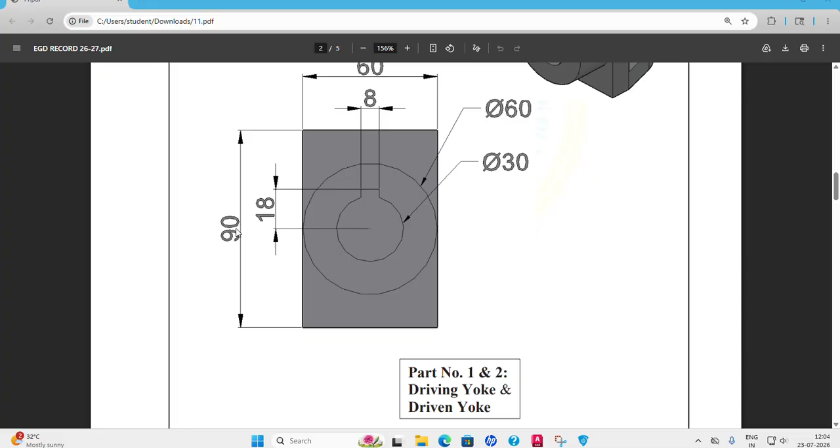This is the first component. It is having 60 mm height, as given here, 90 mm, 60 mm width. Let us draw this shape and extrude it 90 mm.

We'll draw. This is 60, this is 20, this is 15, this is 15, 60. Likewise, one by one we will do.

Open AutoCAD and move on to SE isometric view. Now switch on ortho and 3D modeling, and draw that shape.

60. This is 15. Let it be again, take line 15 and draw. Then from here need to draw one circle.

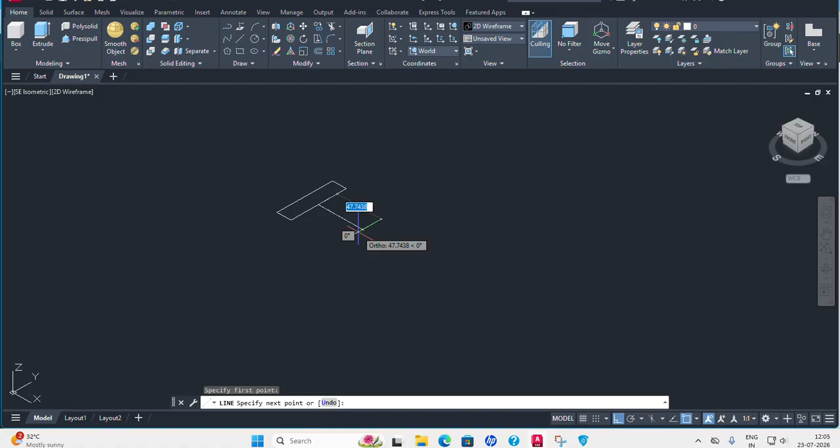How much height? Refer that question. This is 20 mm from this center, 20 mm circle center, and this circle is the outer circle, 23 mm radius. That circle center is 20 mm, 23 mm radius.

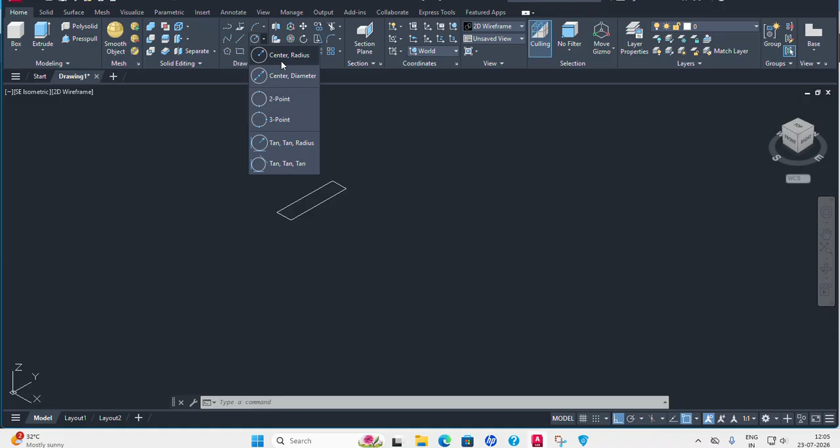So you take circle with radius, draw directly here a 23 mm circle. Thereafter move it 20 mm this side: move, select object, enter 20 mm, and draw another circle of diameter - will refer that.

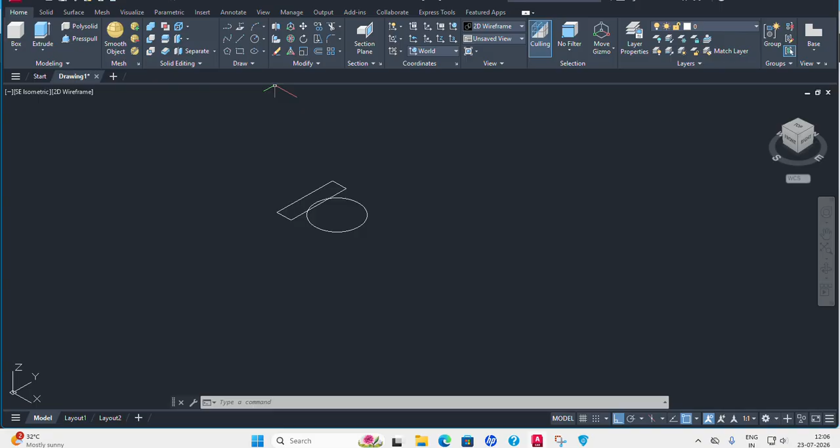Before that, you draw one line from here to tangent, from here to tangent. Join the line with the tangent symbol and trim the unwanted portion.

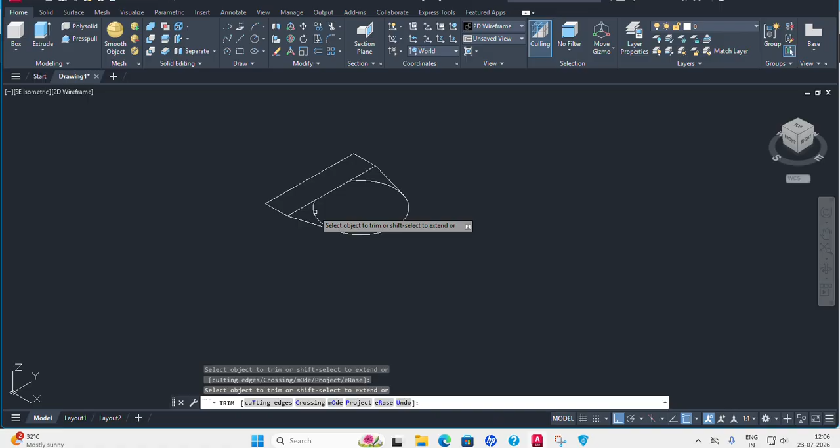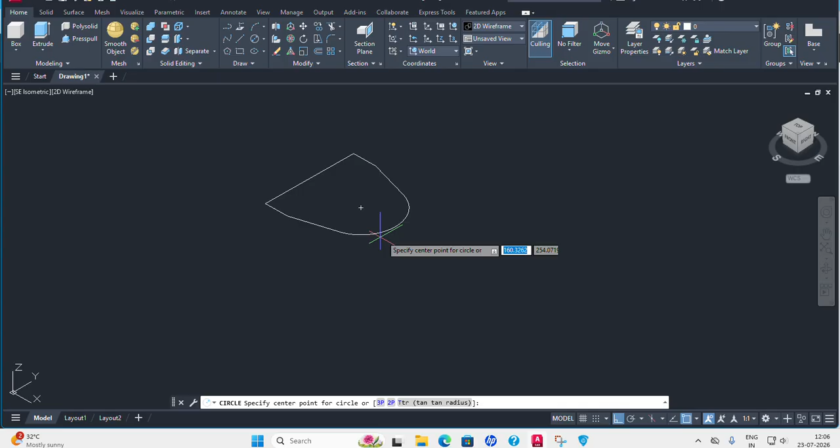You will get that shape, then take circle. What is the circle? Inner circle diameter 16. So you draw that circle of 16 mm dia at this center.

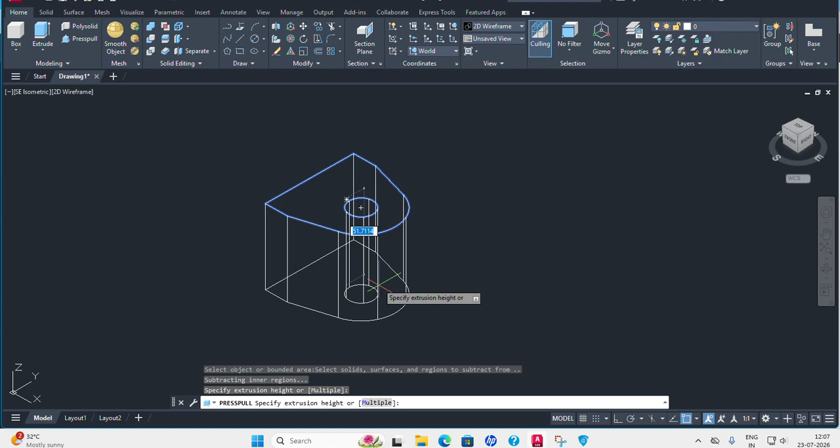Now you join all the lines and then extrude it, or press pull. Press pull is also suitable - select this area and go upward or downward, taking 90 mm thickness.

This is ready. Now a center cut should be taken. That will be 15 plus 15 equals 30. Overall 90, minus 30 minus 30, gives you a 60 gap.

At the center, you draw a rectangle of more than 60 mm. This one random, this one 60, and you complete it. Rectangle - join and extrude.

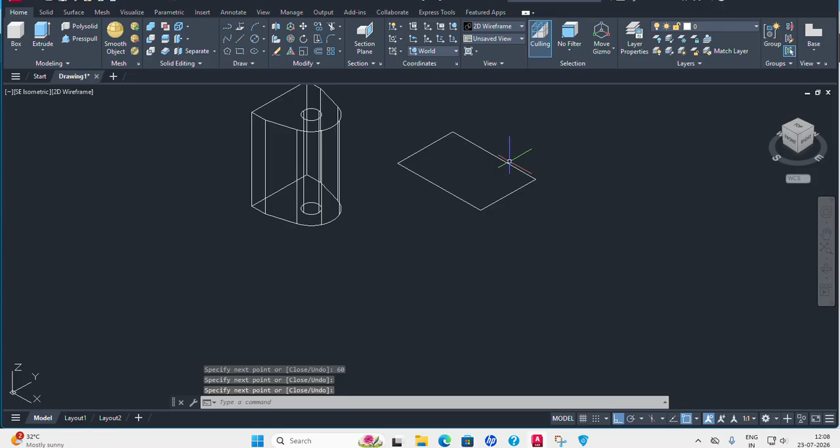We are creating a block. Length is 60. It should be placed in the middle. Move, select object, enter, select this edge midpoint, and place it there.

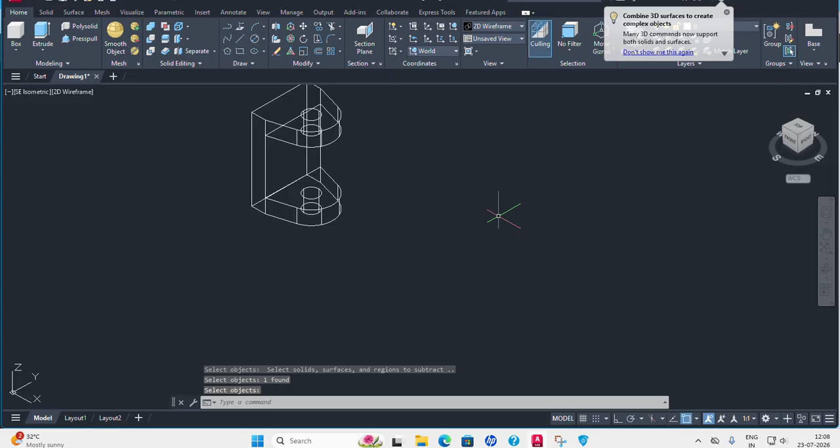We know the Boolean operation, so you subtract the bigger object, enter the smaller. You will get this shape - you can see it.

Then one more cylindrical component should be there. That cylinder length is 30 and its OD is 60 dia. So accordingly you do inner dia 30.

You create this cylinder separately with that keyway, 18 mm. 30, 60.

You change the view to SW - it will be rotated this side. Now let us create the cylinder. Directly you take cylinder; it is coming in this way.

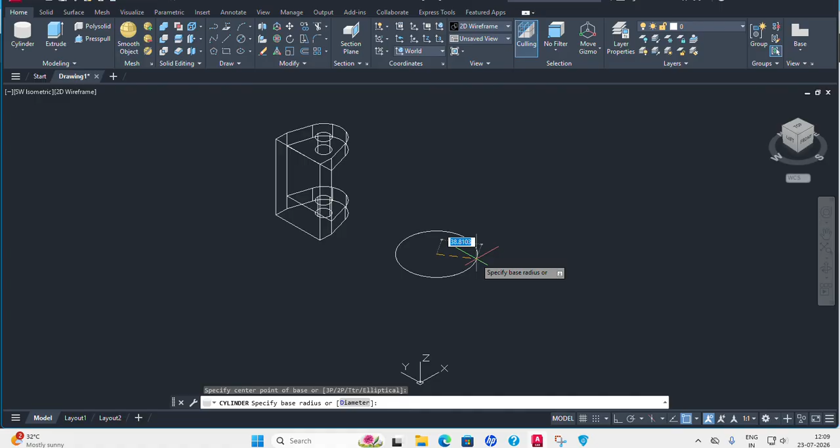Top - you change these coordinates into front and take cylinder. It is coming this way, so you go for right. Accordingly it will come.

Now the diameter is 60 and length is 30. Done. Similar, another cylinder.

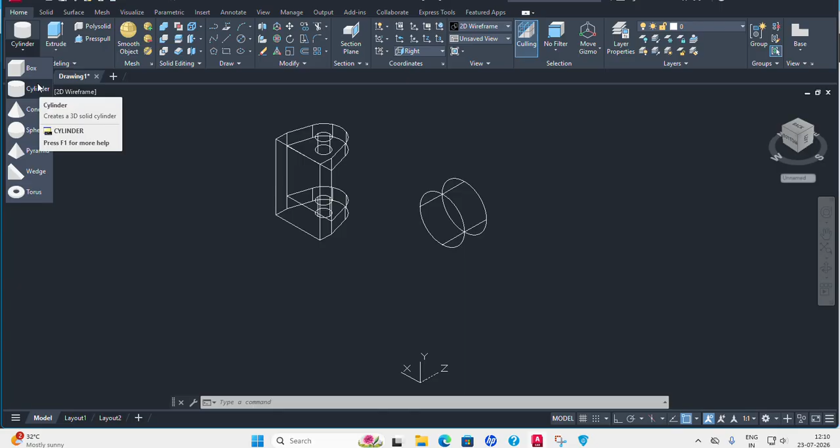Another cylinder should be with that keyway. So you select that cylinder, click. This diameter is 30, I think it is 30 only. Yeah, 30, and this will be from the center.

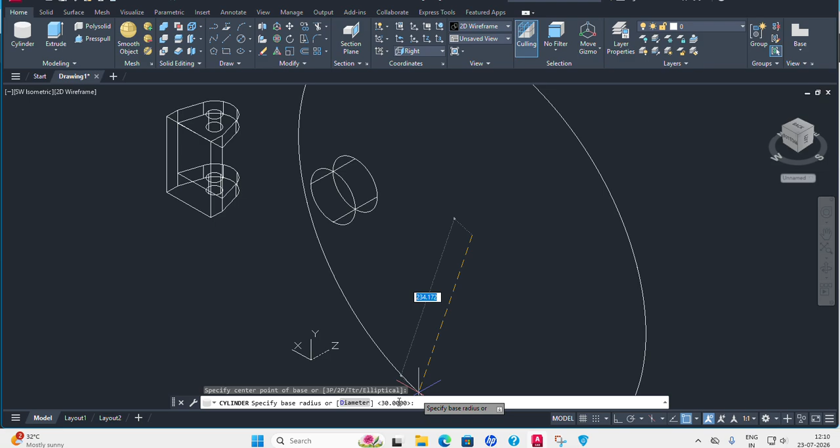We'll create a block - 30 dia cylinder. First let us create 30, and this length is random, 50. Now another block should be created.

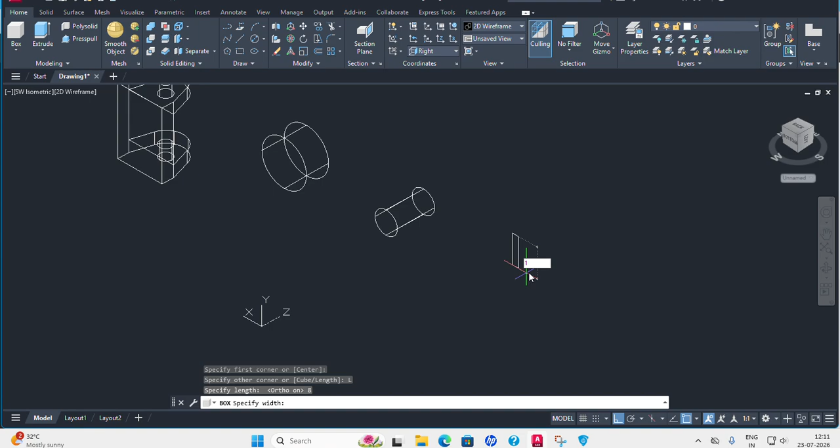Block, box, click, length. This is 8, width of the key, and this is 18 - not 15, 18 - and length is 50. This key is fixed.

The midpoint of this should be kept over this shape. I will view this shape in conceptual, so you can understand now.

Now merge these two solids together using the union command, and this shape should be kept over the inner portion. So move, select object, enter. Before moving, keep your model in wireframe.

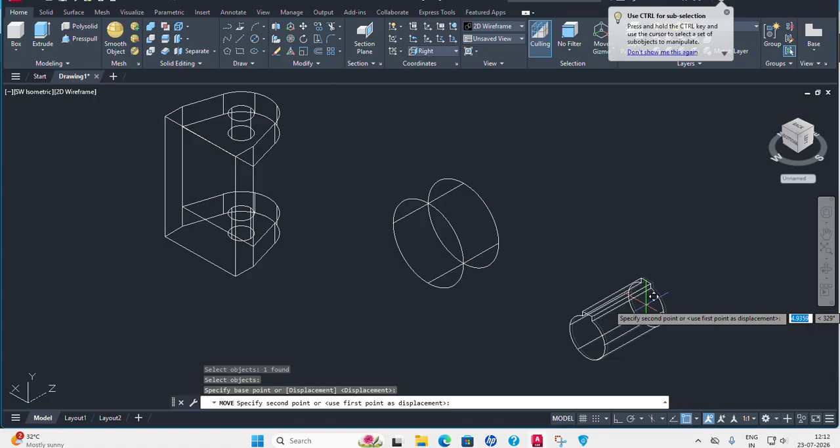Move, select object, enter, keep it here. Or rear - while moving you select that rear center to here.

Now subtract this from this solid, the inner solid. You will get the structure like this and you place this here.

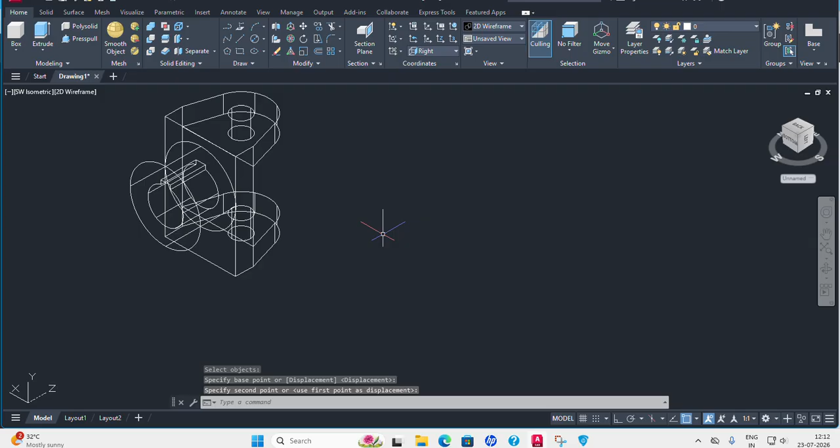Keep it in wireframe mode. Move, select object, enter. This quadrant can be caught and should be placed over the midpoint of this. It got placed somewhere away, so you undo.

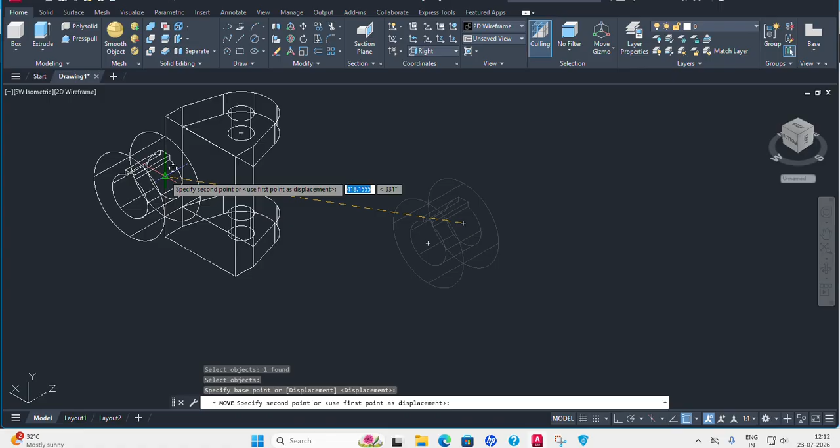Now catch it. Okay, or let us do one thing: select this midpoint and keep it here - edge midpoint - and move it 30 mm this side with ortho mode on.

Move, select object, enter, 30 mm. It will be in the middle.

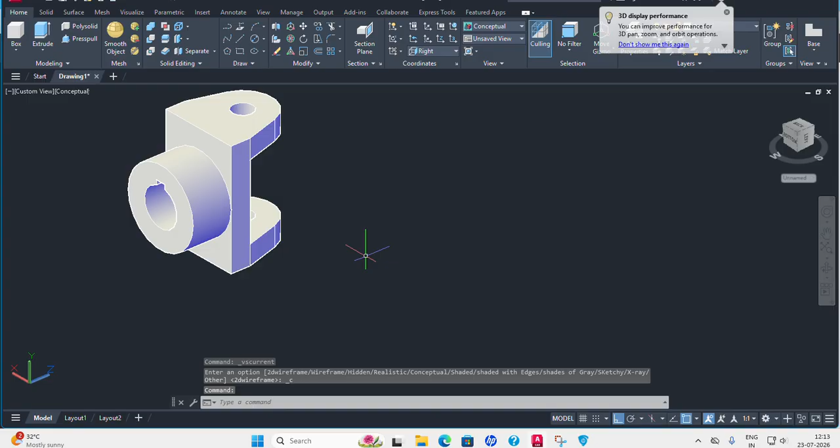Now the component is ready. With SE isometric, we will continue with SW isometric. Okay, merge it together. This is a separate solid, this is separate.

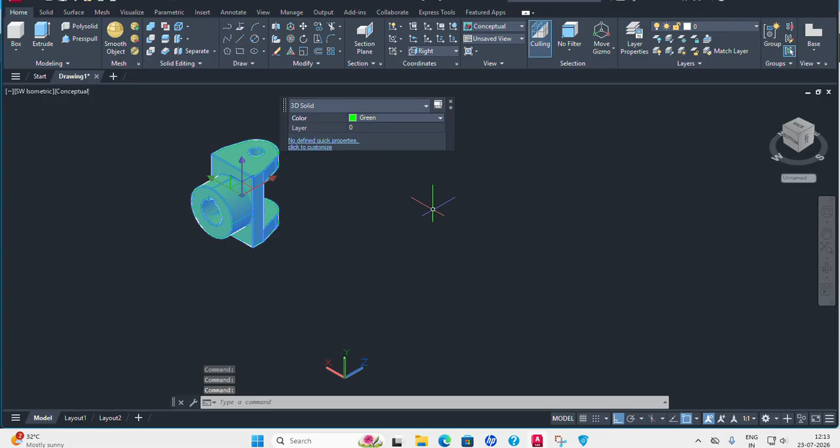You union them together. Select 1, 2, enter. It will be unioned and made as a separate color, green. Now the second solid will refer to this one.

This is 2 cylinders, length 60 mm. Outer 30 dia, inner 16 dia, length 60, same for both. 2 cylinders, identical, both are 30, 16.

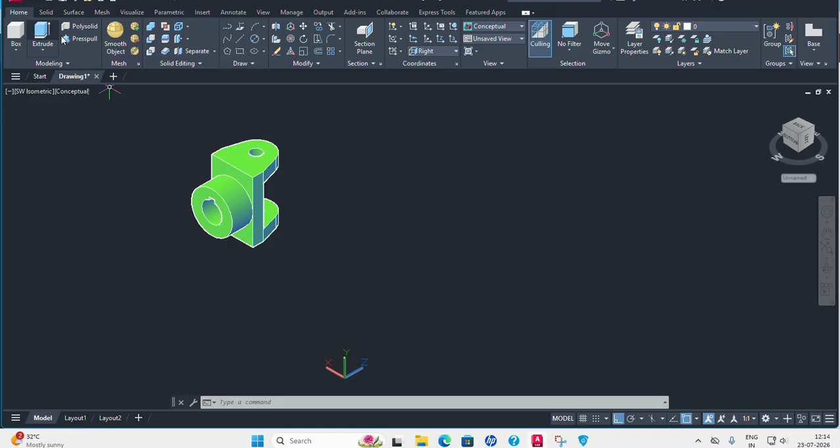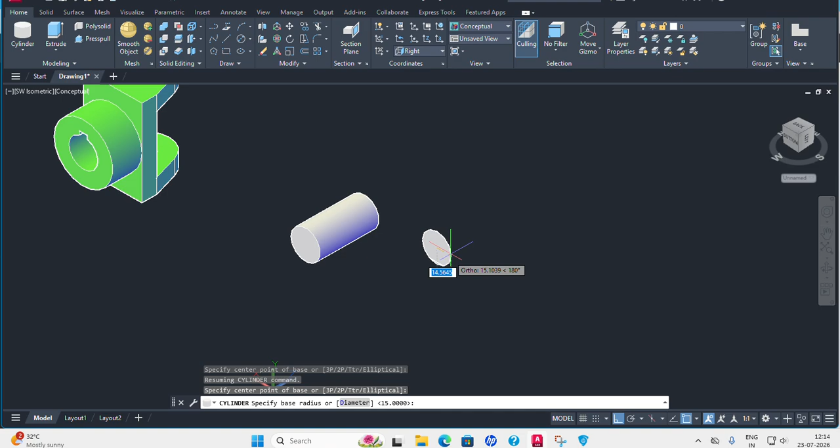Okay, we'll take cylinder, click, dia 30, length 60. Now inner 16 cylinder, to do the hole, dia 16, and length more than the length, random, because it is going to subtract.

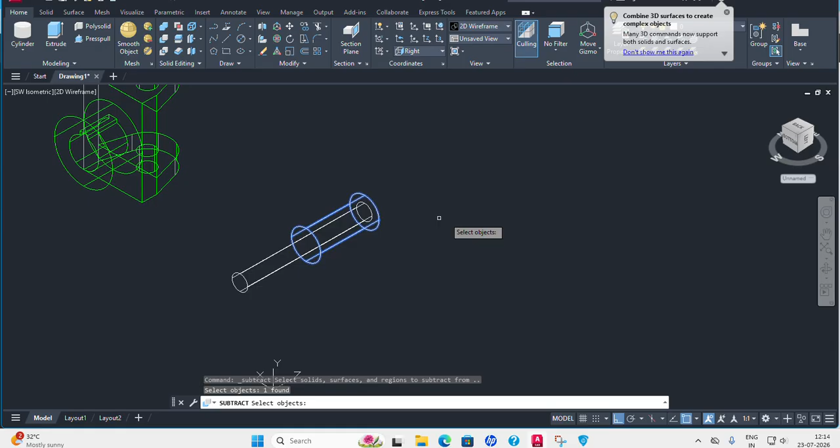So you place it and subtract. Move, select object, enter, and place it to the middle concentric, and then go for subtract, select bigger, smaller. Next you will get the cylindrical pipeline structure.

Similarly, we will make a copy of this, because there are two numbers needed. So to create this, we have to create two numbers, and it should be 3D rotated. Select object, enter. According to the green color ring, it should be rotated 90 degrees. Catch the green color ring, angle waiting for 90.

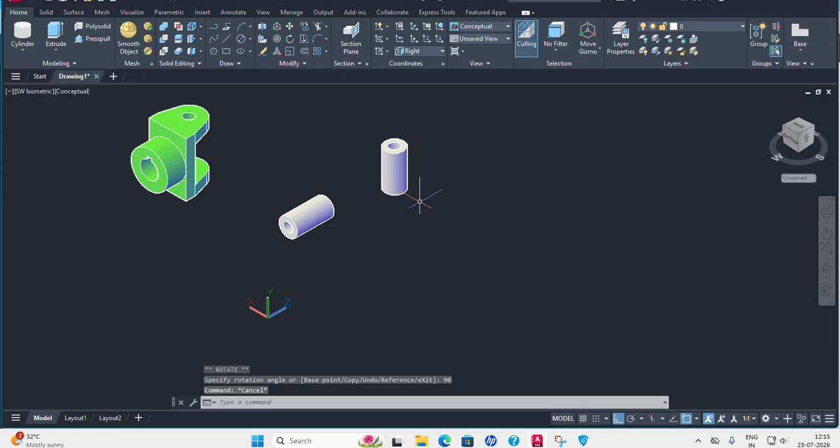Okay, now keep it in wireframe, and we will move and place it center to axis, 23 mm. There is 23 mm, it is in the middle.

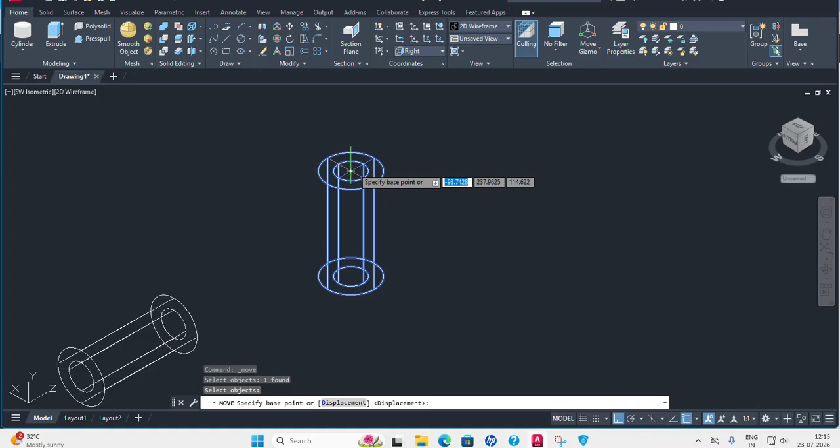So how to place it? You move this to first center. This one will be switched off also here. Okay, edge. Then you move it.

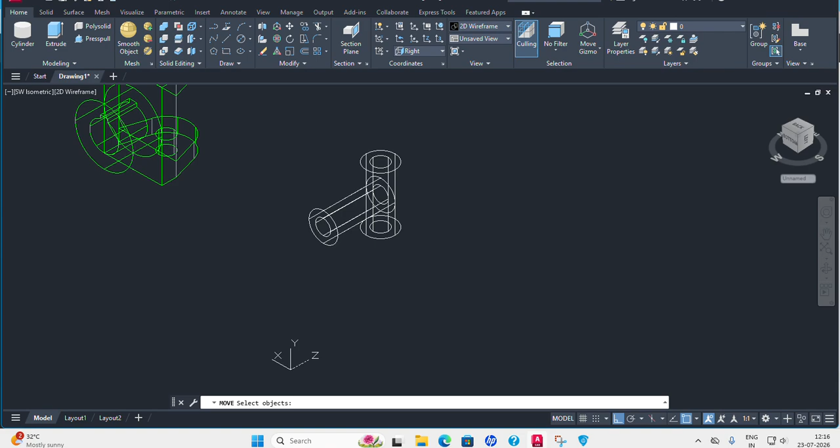We know this length is 30 mm upward. Move, switch on ortho. Move it 30 mm upward, and this side 30 mm. Move, select object, enter, this side 30 mm.

Now center to center, it is now merged together. See that, like that, it is merged. Now keep it in proper view, SW isometric, and move this vertical cylinder this side 23 mm.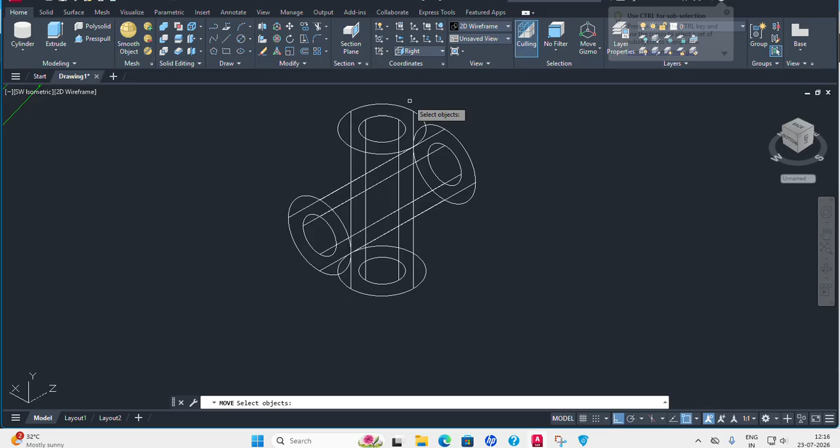Move, select object, enter, 23 mm. Okay, done. Now keep it in realistic or anything, you can see that it is created. This is a separate solid, this is a separate solid, merge together.

Union, select both solids and enter, it will be a single solid, and color it red maybe. Now the second solid is done.

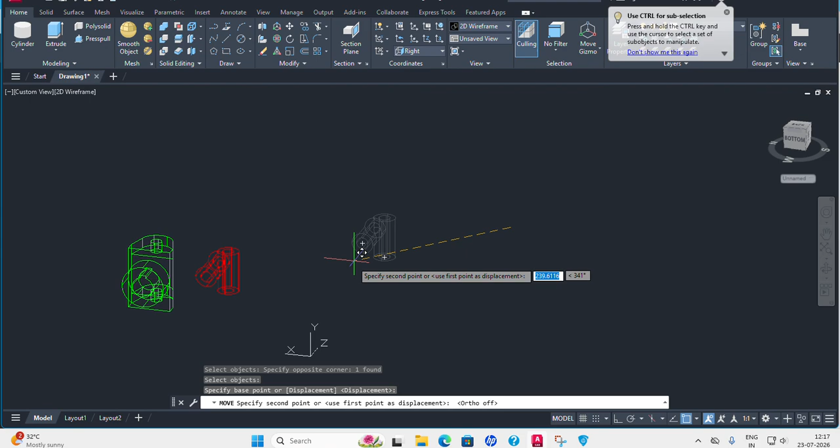Third solid, let us have a look. A simple collar here, that is OD outer dia 24, inner dia 16. Radius. Thereafter we will take a fillet, and one through hole is there, 4 mm dia.

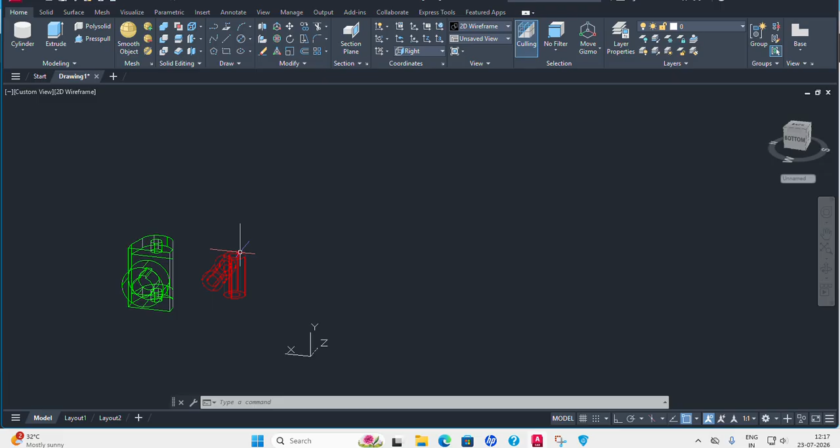First we create the collar. Outer 24 dia, inner 16 dia. Keep it in a proper view. Always keep the view in proper SW isometric.

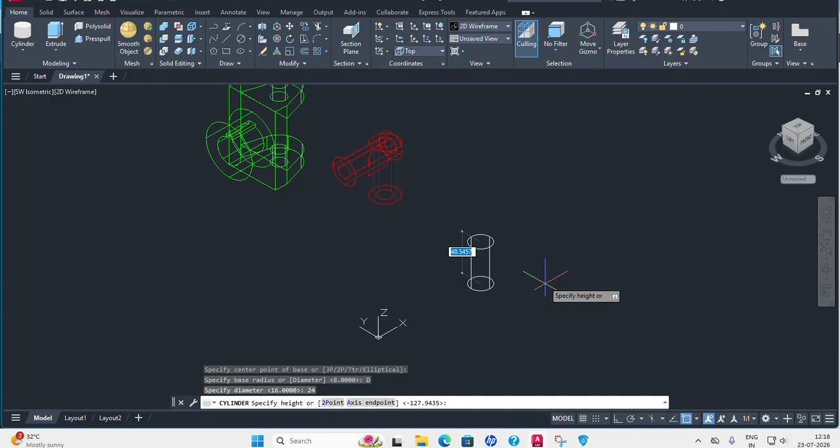You have to go for top view. Take cylinder, 24, 16 dia. You always go for dia 24, bigger, and height is

thick 8 mm, thick 8 mm. So height is 8. Then another cylinder of 16 dia.

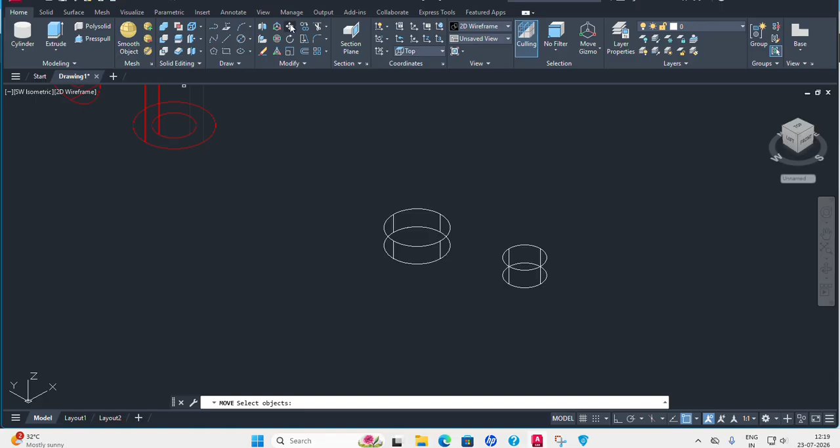Dia cylinder, click dia 16, 8, and place it together and subtract smaller from the bigger. Okay, you will get the shape.

And now a simple fillet operation should be taken. Fillet radius 1 mm, here this edge as well as bottom edge radius curved.

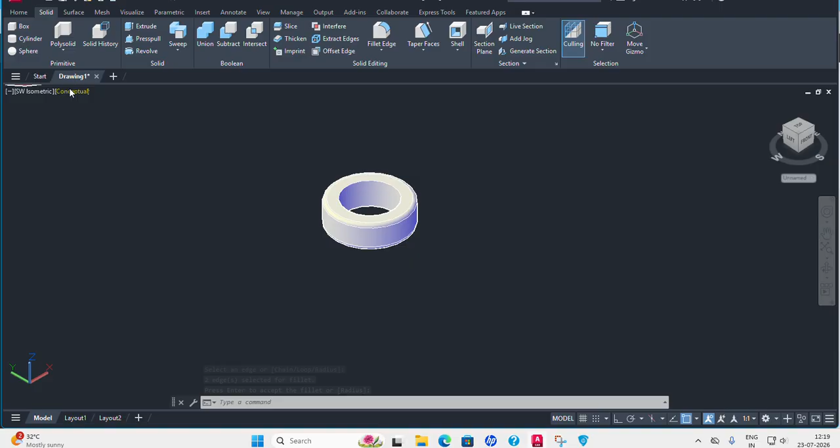Okay, now one through hole should be there. You make it okay. Now from the bottom to top center you draw one line. See one line, axis line. Easy to perform that

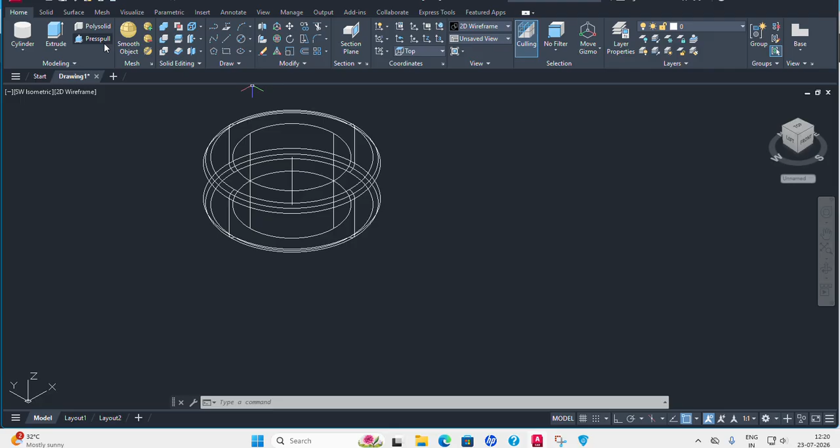whole operation. Now let a cylinder create the cylindrical shape to create the hole. Dia 4 mm, length more than the OD. So you take this, this will be in the front view, so change the view to front and then take cylinder.

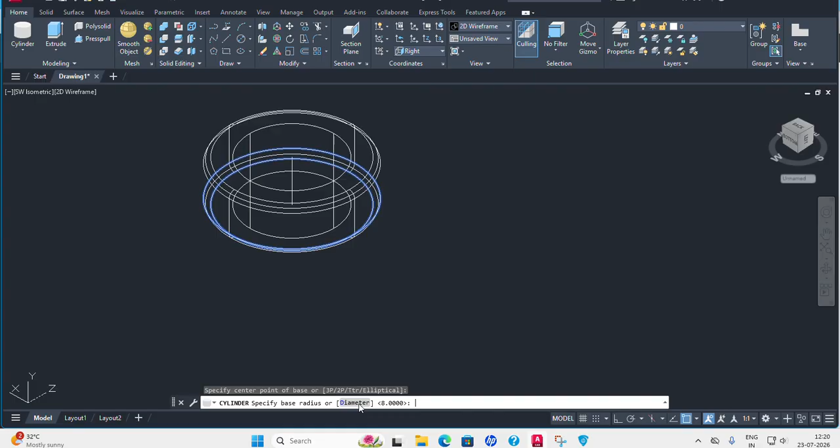Anyway, we'll do not front, right or left. Cylinder dia 4, dia 4 and length more than. Now you draw here also one axis line. It is not showing axis line, so okay, let it be.

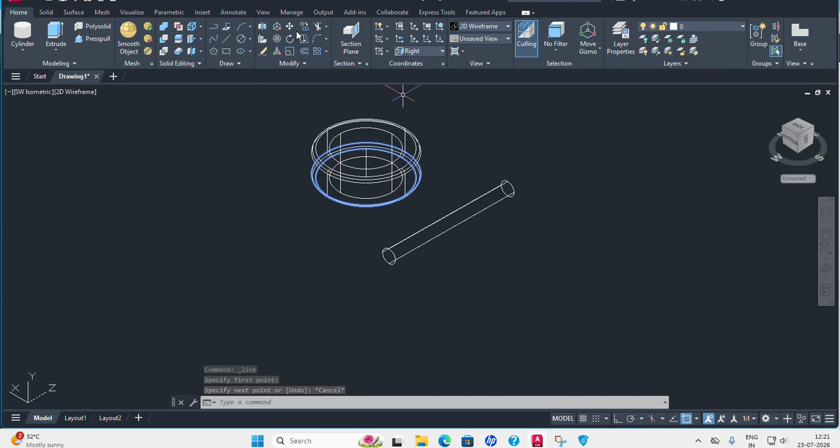We'll move the cylinder to this center, to this line midpoint first, and with ortho mode on you move, intersect with this side. Move, select object, enter and drag it until it intersects both walls of the cylinder.

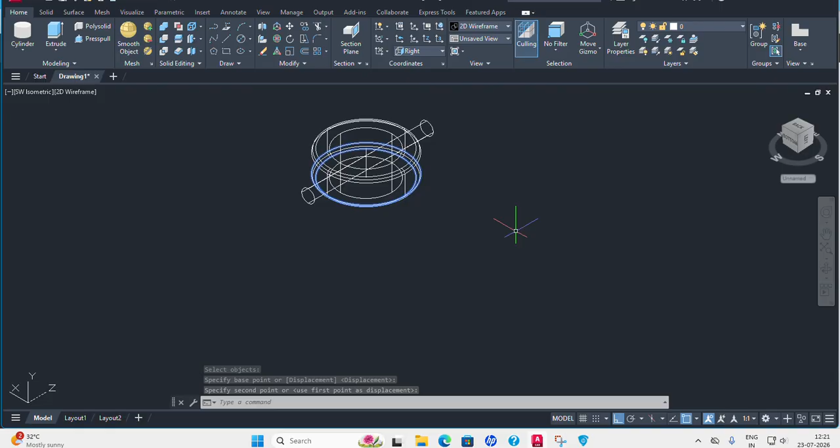Okay, now subtract. See, now the shape is like this. Subtract this solid from this solid, you will get the hole. Subtract, select object, enter, select, you will get the color.

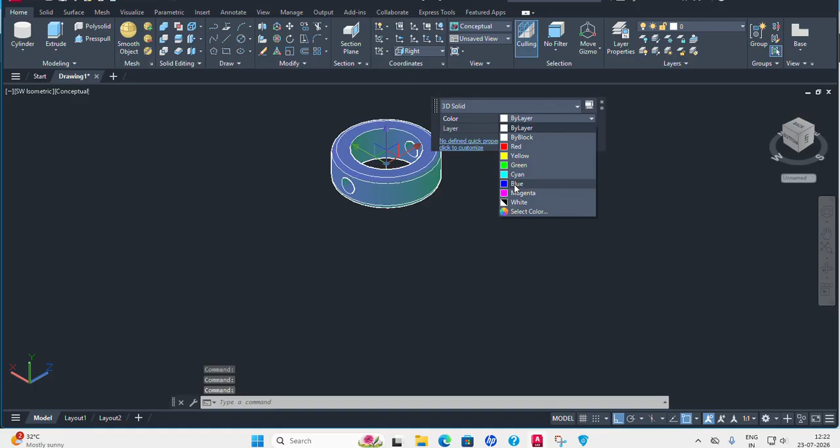Double click and you change the color. Then and there you change a different color. Okay, done, 3 objects done. 4th object, a pin, simple pin. 2 cylinders, combination of 2 cylinders or revolve operation.

Revolve. This is 12, this is 8, 113 overall height. Now we will do the revolve operation.

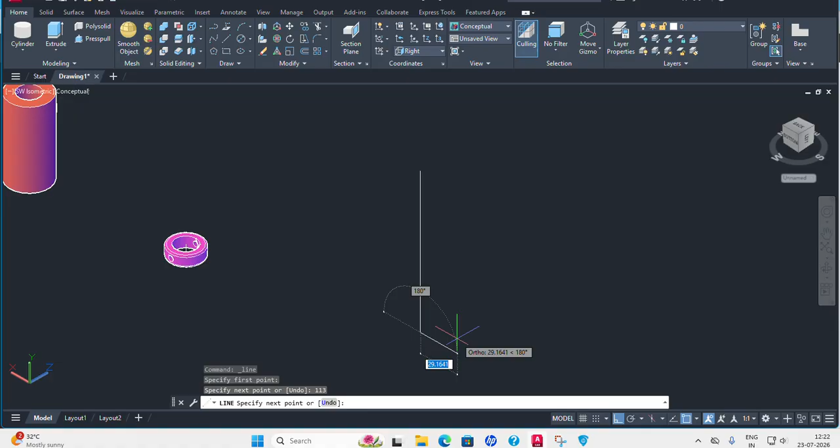Take line, 113, this one 8, then 8. Okay, we'll do 8 mm, 8 above. How much? Step by step. See, 1.

Length not given, 94. This is 94. Then 113 minus 94 will give you this length. So 113 minus 94 will give you 13 plus 6, 19 mm. This thickness is 19 mm. So 94.

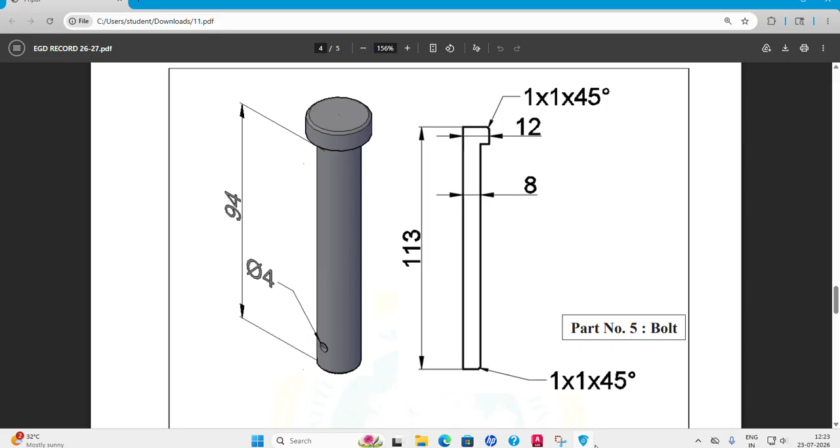This is 94. This is 12 mm, 8 already, 4. Then this one 19. Okay, done.

Now you join everything with the join command. Okay, now revolve it, revolve command. We are going to revolve this. Revolve, select object, enter, axis, this line is axis. Select that line, it starts revolving. See that? This is the revolve operation.

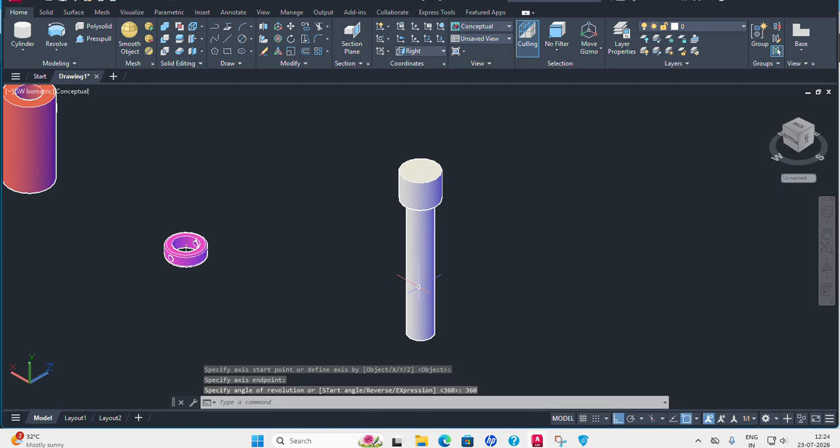So how much degree? 360 degree. Okay, the pin is created. One more small chamfer is there, 1 into 1 into 45 degree. So you go for chamfer solid, chamfer edge, distance 1 1.

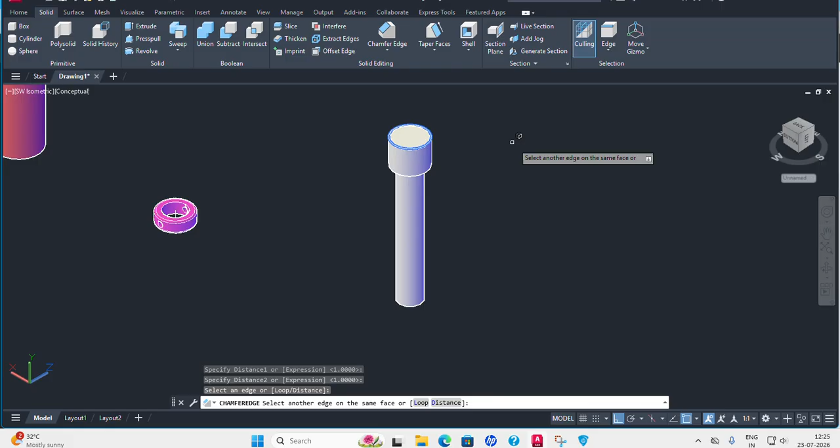Okay, first distance, second distance, you select that, it will be chamfered. Done. Double click and change the color. Okay, yellow, let it be yellow.

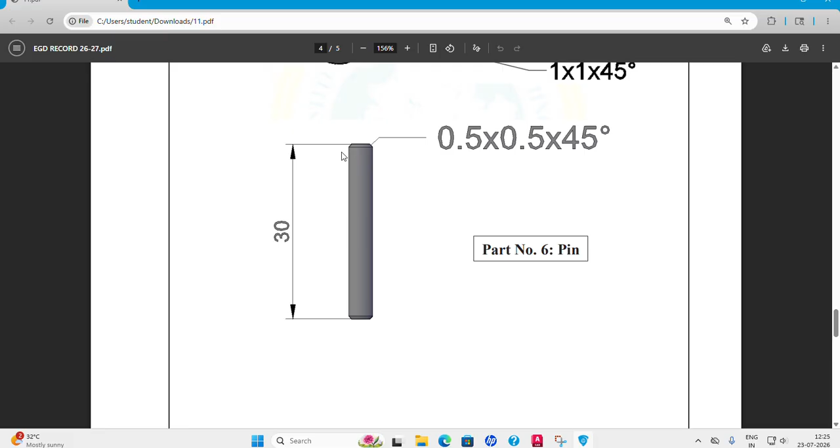Then 4 components, fifth component, let us have a look. A small pin, 30 mm, dia 4, length 30, it is a cylindrical component. You say take cylinder and top view and click it, dia 4 and 30.

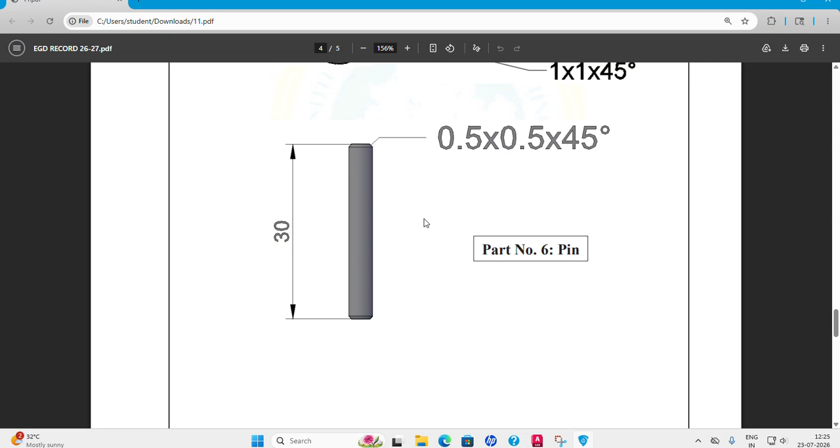Okay, this is the pin, insert pin in this collar. So two sided, it is chamfered, 0.5 mm chamfer. You go for chamfer edge and distance 0.5, enter. Again by mistake I entered 5 mm, so chamfer distance 0.5, enter. Again second distance 0.5, enter.

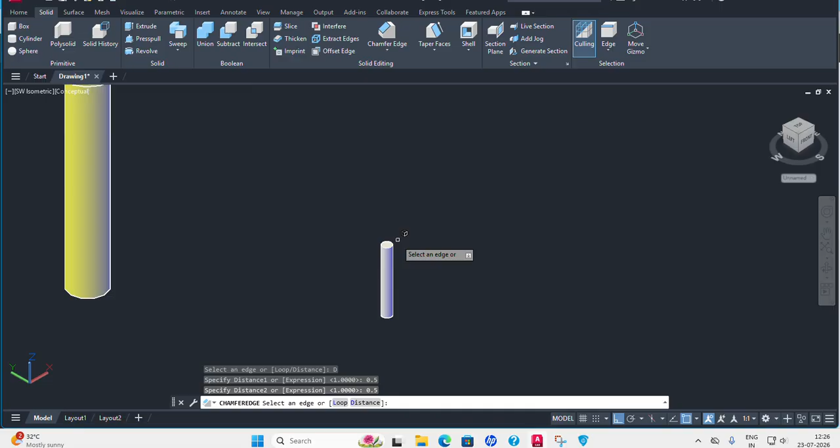Select both circular edges, 1 2. Okay, done, done, chamfered, and you change the color. Okay, done, pin is done. Now 5 components ready to assemble.

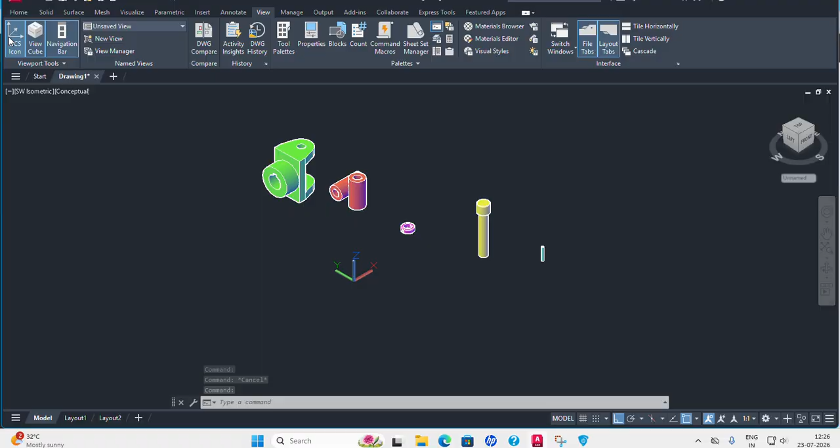Now one by one we will do the assembly. Now let it be pin. We will change the view into SE, comfortable view. Now this pin should come here. So before that it should be rotated 90 degree. So solid 3D rotate, select object, enter.

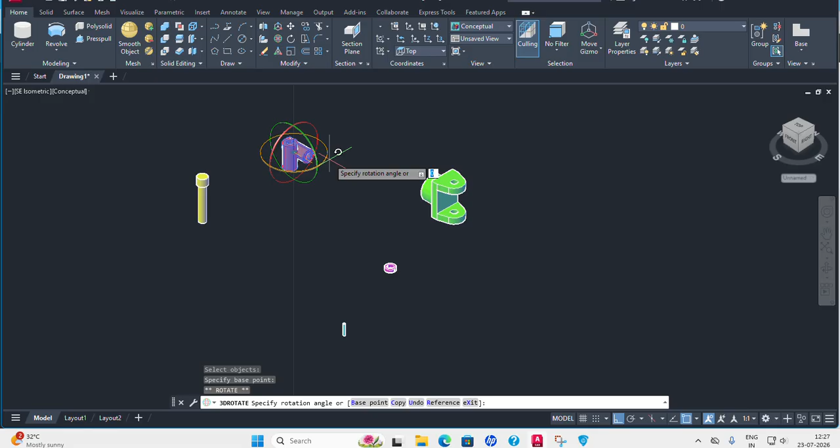This ring, according to this ring, you catch that ring. 3D rotate, select object, enter. This ring, this side, -90, -90. Okay, done. Rotated and place it here.

Okay, while placing, you better keep 2D wireframe. Move command, select object, enter. Catch this center and switch off ortho, drag it and place it in the inner center. Okay, done. I will make a conceptual view so you can see where it is placed. Okay, done.

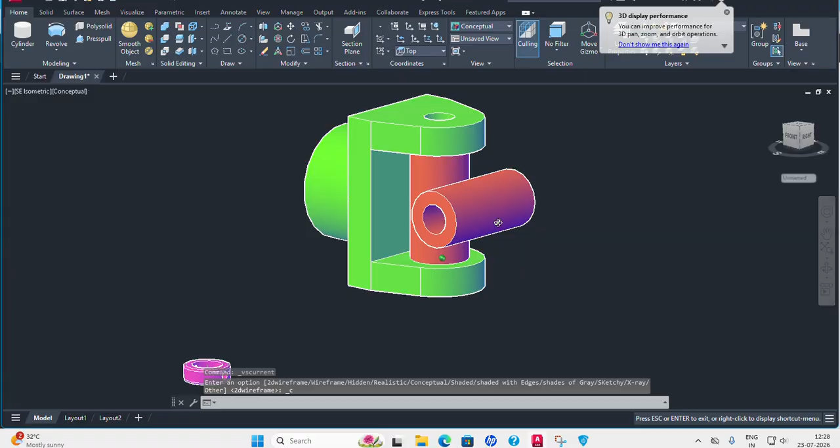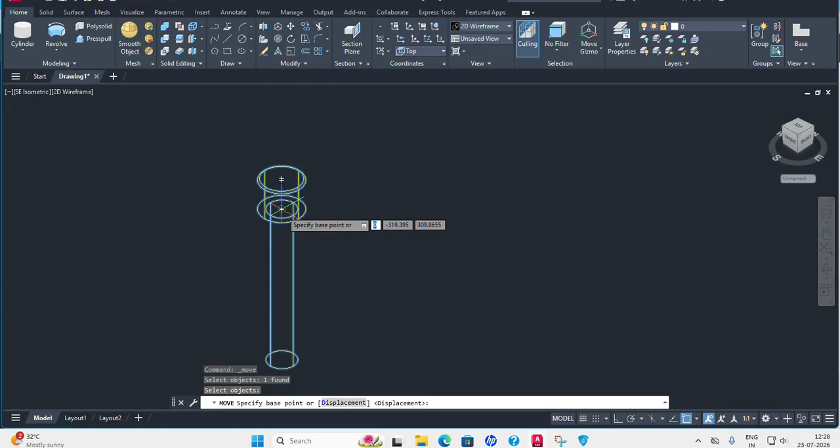Suitable views can be selected from here, and conceptual into wireframe. And second thing, pin should be inserted. This pin, move, select object, enter, and this top center or this center to be caught, and this should be placed over this center top.

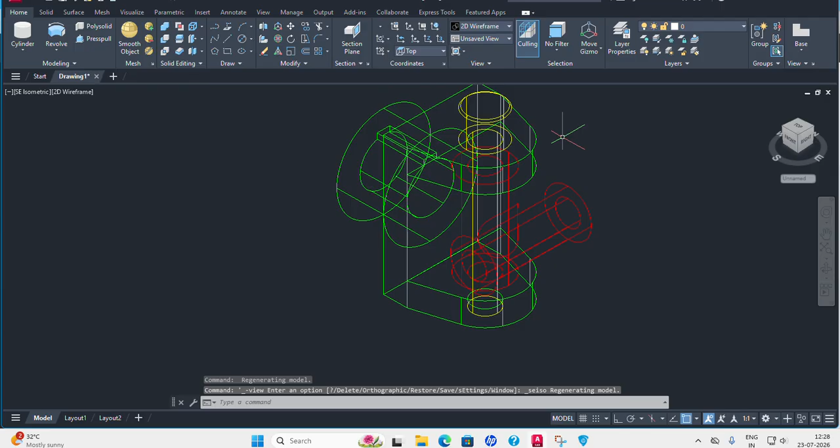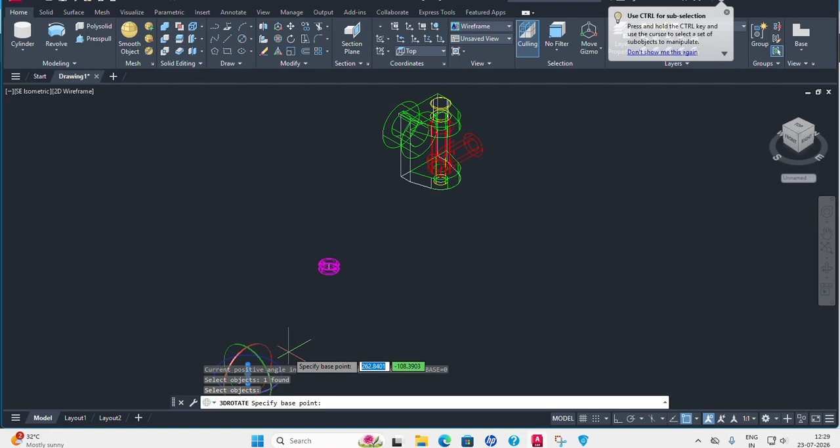Now this taper pin length is not sufficient, so we need to edit it, lengthen the pin. Now this pin also to be inserted here, rotate this horizontal according to the green color ring, 90 degree, and then move it and place it.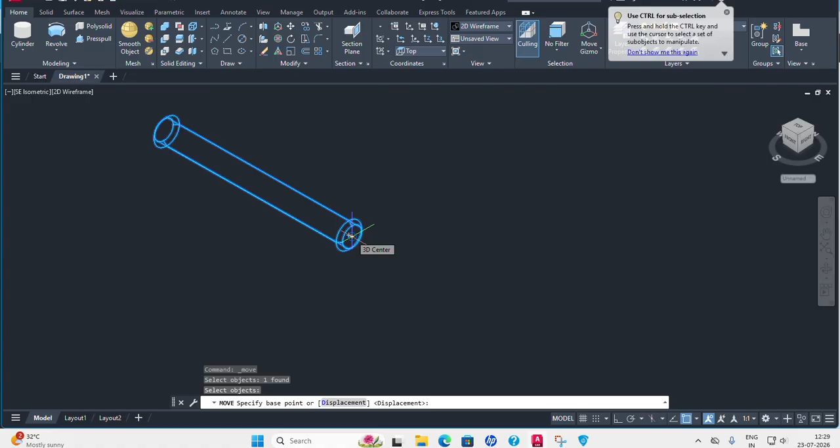Move, select object, enter, catch this center, one side center, and place it in this center. It is not, or you can go for midpoint of the axis and then move it inside this side. What is the collar dia? Accordingly we will move collar dia, 24 dia. So 12 mm you can move, 12.

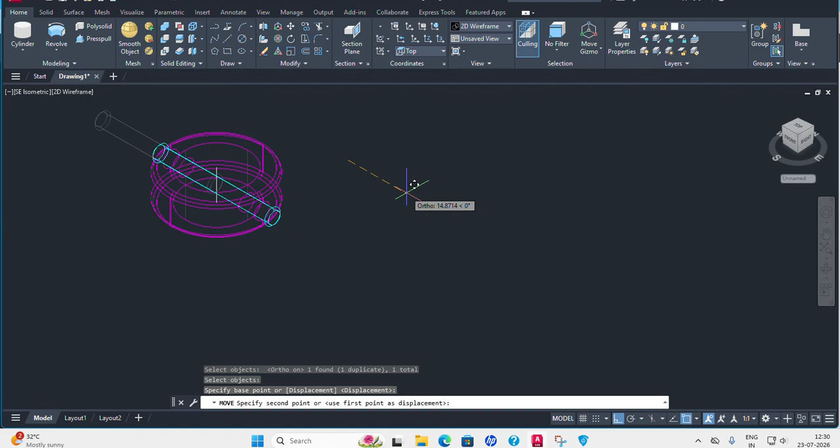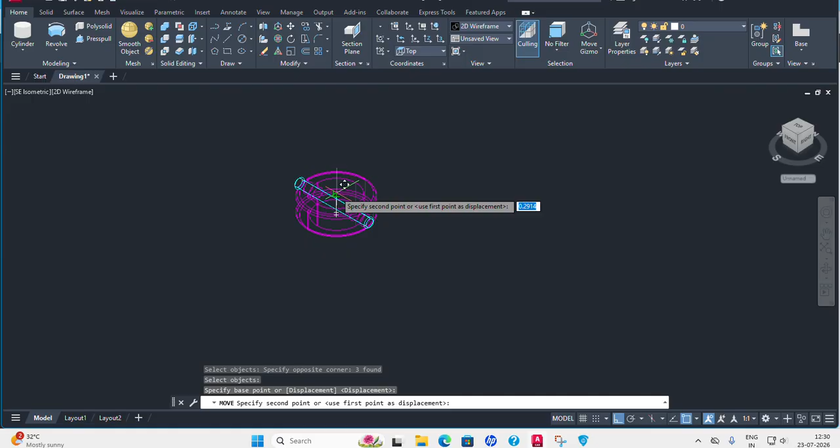Move, select object, enter, ortho mode on. Likewise you can make it assembly, and this collar should be kept at the end of this pin. Select object, select both, and then catch these points, switch off ortho, then place it at the end of this collar.

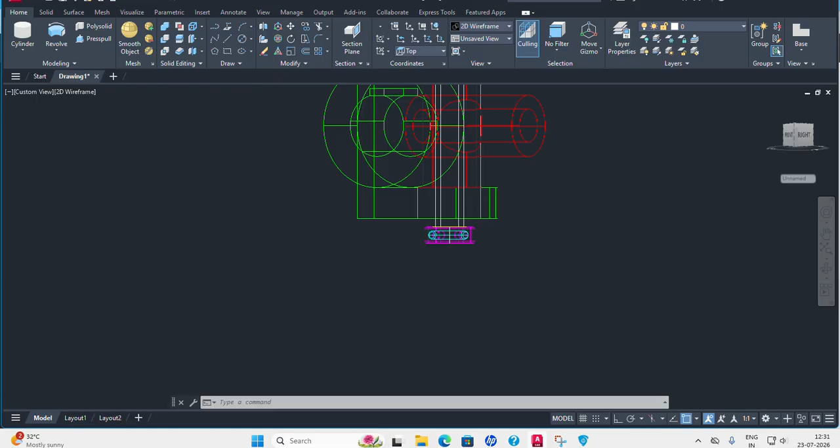Okay, this pin, see that? And then little bit inside we need to move, so you keep it in isometric view, same view, or you go for front view. Front view, you measure this gap as well. Linear, select this here to here, 5 mm, okay, or 4 mm.

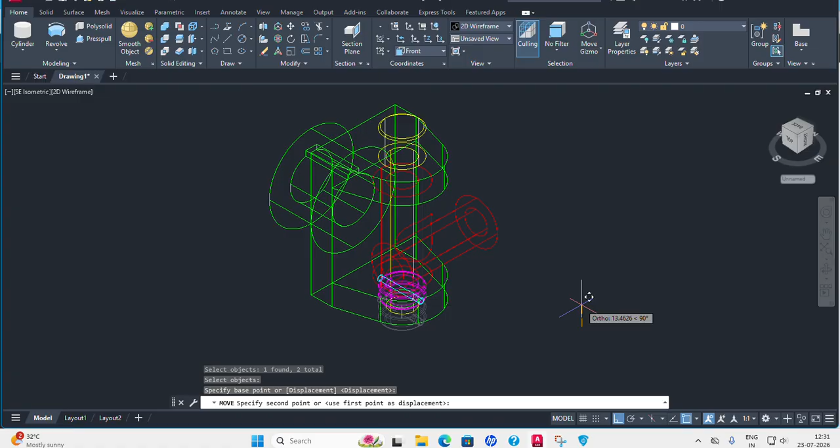Let us move it in isometric view with switch on ortho mode, then only it will move in a straight line. Move, select both pin as well as this 4 mm, upward 4 mm. Done. If you rotate and see, you can see that it is merged together. Now the same set of things to be done here, this side.

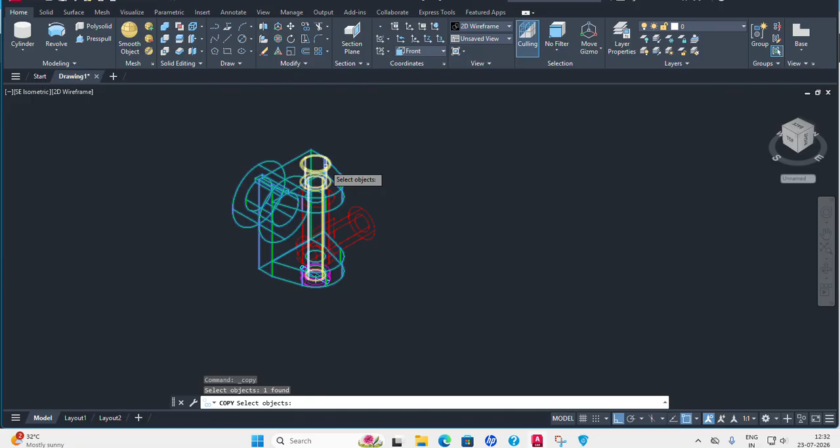For that we will make a copy of this one, this side. Copy, select this pin and collar and taper pin. Drag it and rotate it. This side first, let us rotate right side, and then upward we will rotate. One by one we will do.

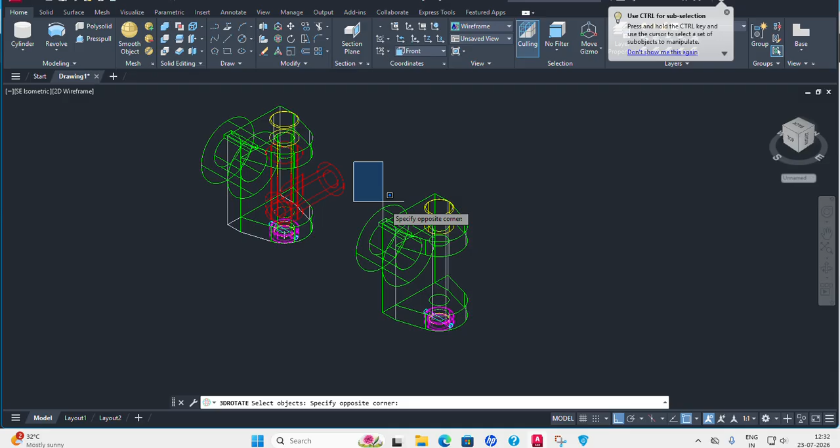Select object, rotate according to the green color ring, will rotate 180 degree. Wait, I'll select, rotate, 3D rotate, select object, green color ring, 180 degree. It is this side, upside down.

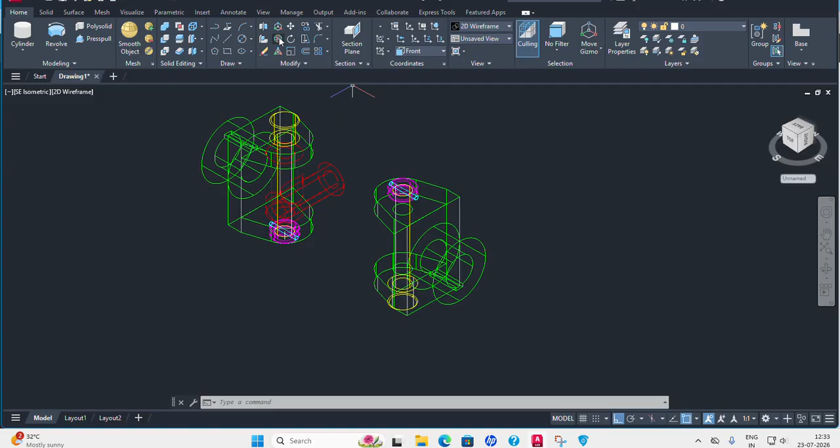Now rotate this side 90 degree, 3D rotate, select object, enter, according to the red color ring, because this is going to fix with this red color ring, 90 degree. Okay, done. Now this should be moved and placed there.

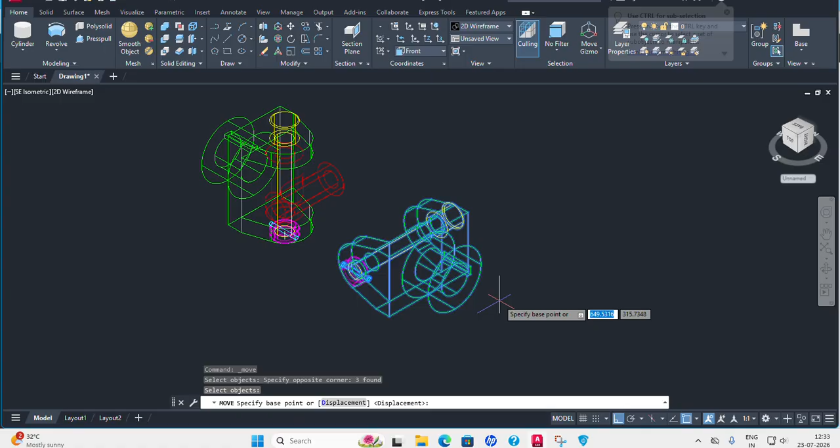Move, select object, enter, and base point will be, if we catch this point, it will be suitable. This point, this point, this point, click and place it on this point.

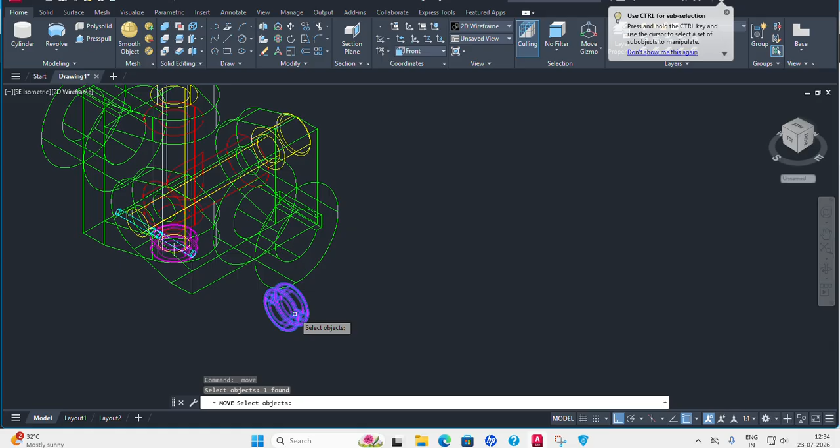This ring is not selected, better you select and move it and place it on this pin. Done, now the assembly is made.

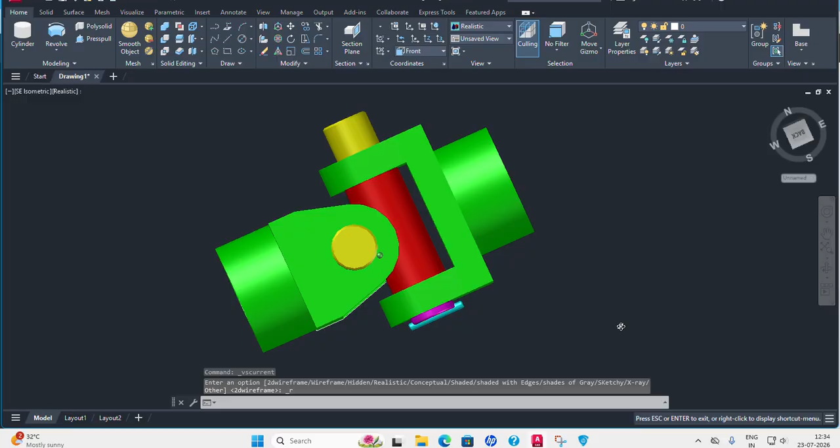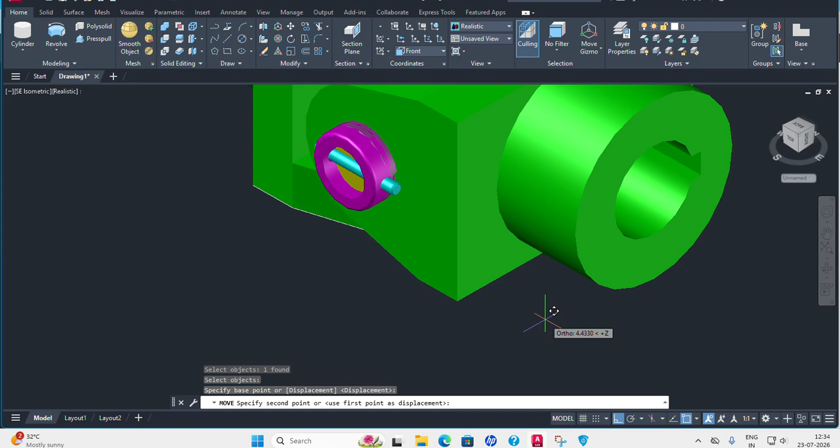You go for realistic view and rotate and see. You can see that this ring is a little bit inner, so you will adjust that. Switch on ortho and move it little bit away. Yeah, done. Okay, likewise you can go for assembling the components.